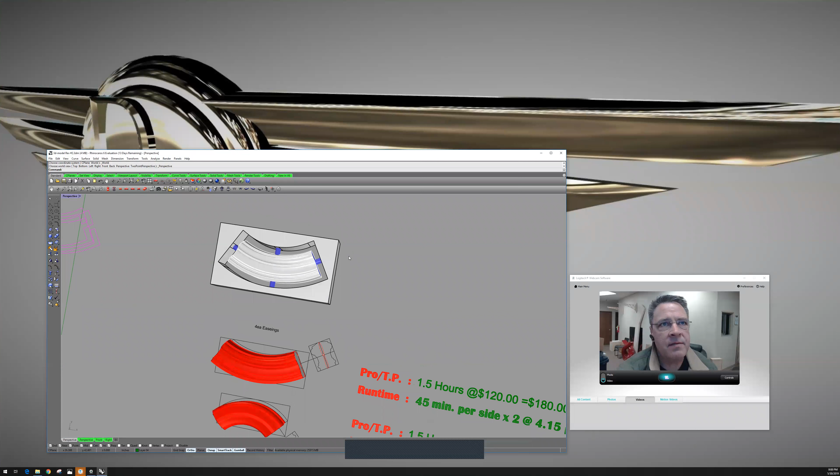Valerie's sending over, or by the time you get this, you'll have already gotten it, a breakdown for all of the different parts. So let me bring this guy in real quick. So what we have here is the first line item. We have the router bits specified in there if we wanted to do that.

This is the piece suspended with tabs. So we just have to sand those tabs there, these guys on the end. I'll cut a majority of the edge here, obviously leaving this circular tab piece in the middle there. But it'll have a nice square edge because I'll use an end mill going down and then step around that.

And then we'll 3-axis mill all this other stuff, and we'll actually travel along here and then out, but leaving that tab. And we'll step up over the top of that guy right there too.

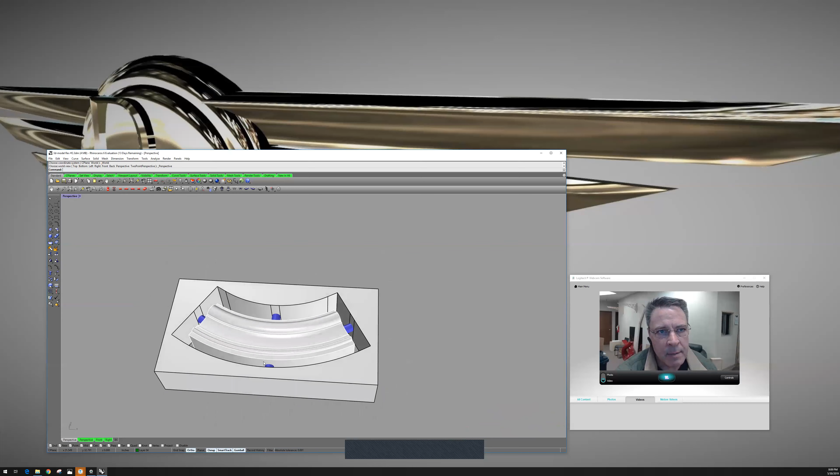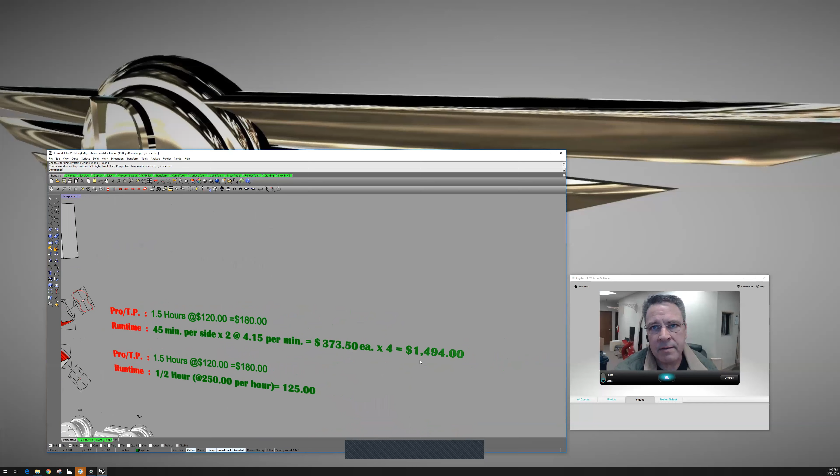So we have the 4 easings. This is the breakdown. Valerie rounded it up because our program ended up being 1,500. When I did it by the per minute, it came to 373.50. But the proposal says $1,500, so an extra $6. But anyway, here's the breakdown for the other pieces.

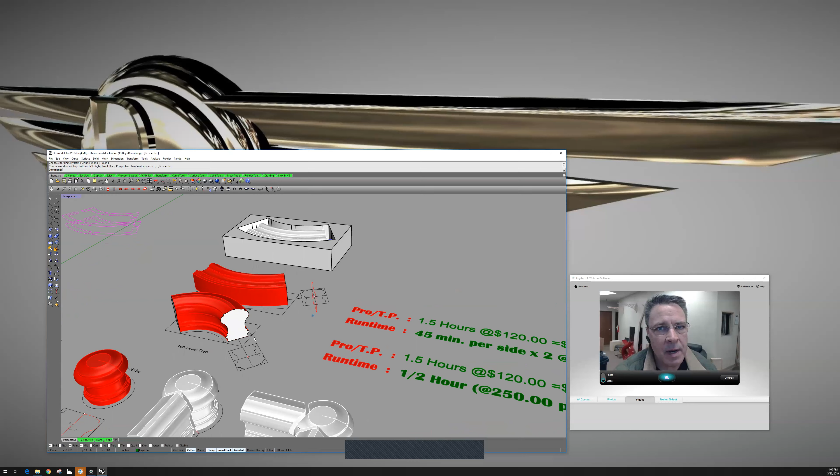So the one level turn. We're going to do it on both sides. We'll use the router bit that'll cut the top profile, flip the piece over, and then the other router bit will cut this bottom section. The runtime's a half hour.

So we'll cut one side, flip it over, and then do the other side. So for a total of 125 on the actual runtime, programming and tool pathing. That's just a one-time cost, but that's $180.

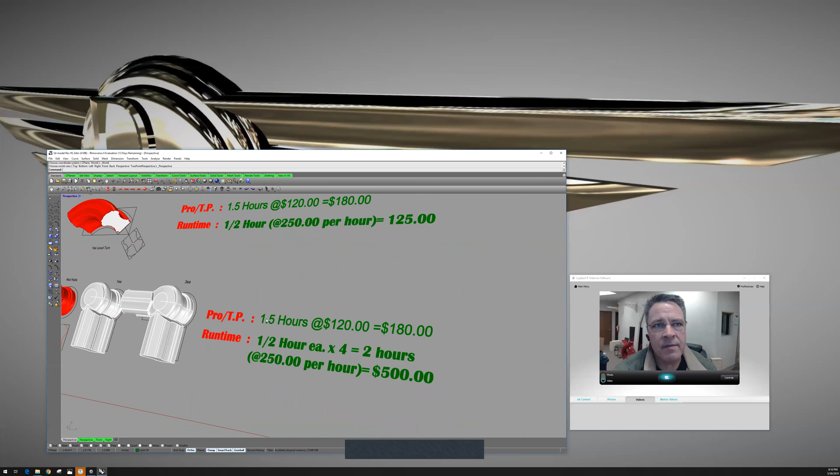On these guys, the hubs, we've got 4 of those, so we just have the one-time programming and tool pathing at 1.5 hours. So that's the same. Runtime is a half hour for each part. Once again, flip over, recut the part, and so 2 hours total, $250 an hour, $500.

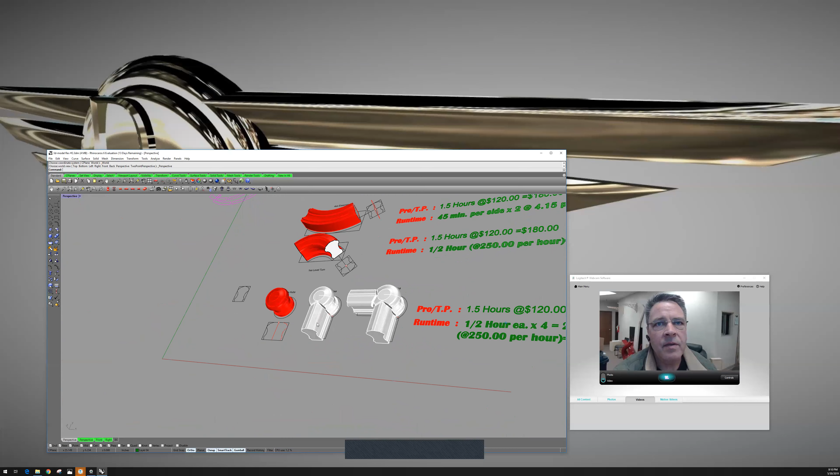And I will cut those miters if you want me to. You can see I've got the little radius. That's an 1/8 inch radius. So we would be using a 1/4 inch cutter on the inside of that. So if you want me to cut those guys, that's what it'll look like. I can put this back in there so you can see what it looks like.

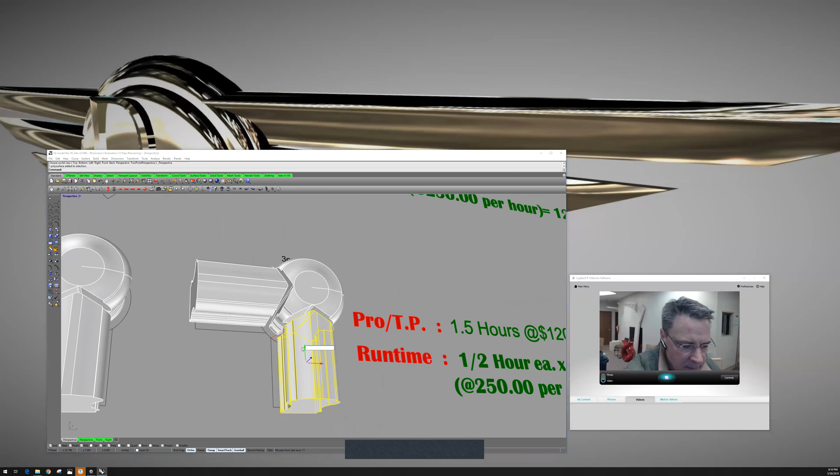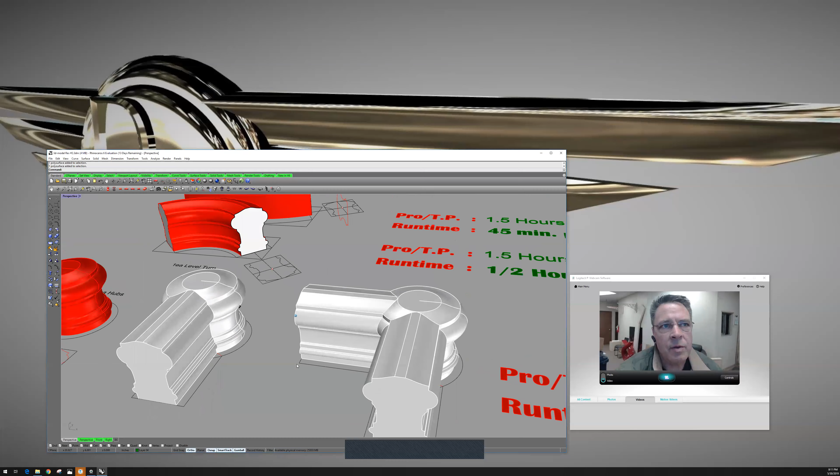0.25. Put this guy back in there. 0.25. And put that one back in there. So that shows you what the pieces are going to look like. Way better than just doing a radius on the inside there.

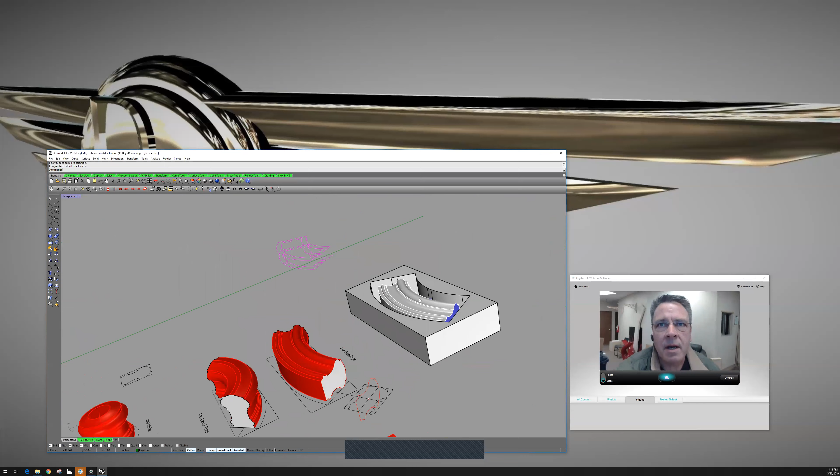It's pretty cool. So anyway, just let me know if you want us to cut those with the router bits, and if you give me the material, I can start cutting these guys this weekend.